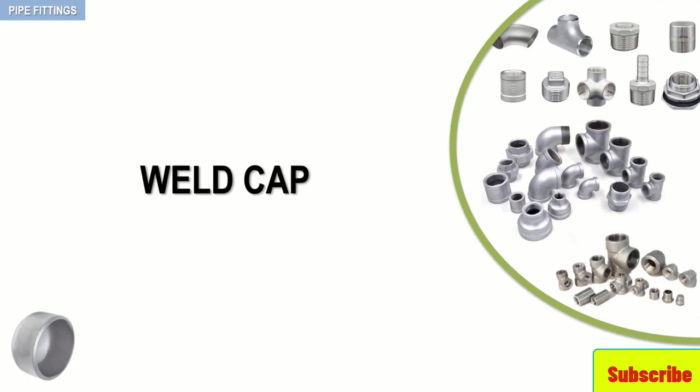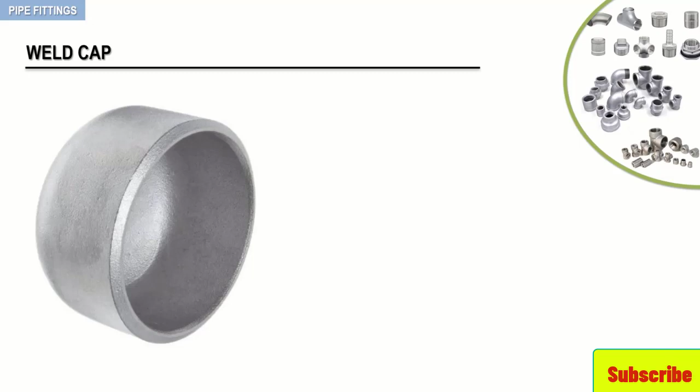The last weld fitting we will discuss is the weld cap. Let's have a closer look. The weld cap, as in this example, is used to seal or cap the open end of a run of pipe. You can see here a typical example of a pipe equipped with a weld cap.

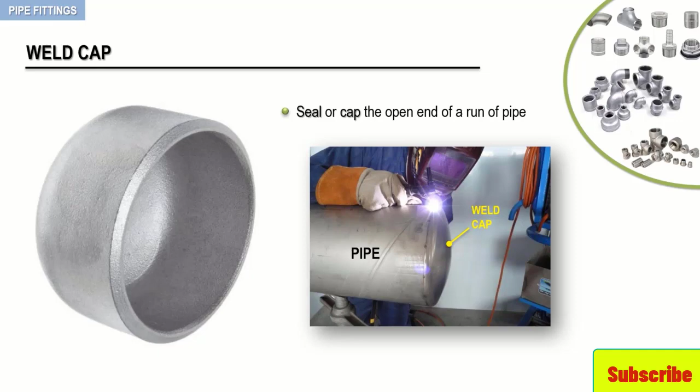On isometrics or mechanical drawings, the weld cap, just like most other fittings, can be drawn as a single line or double line symbol, depending on the pipe nominal size. When representing the cap on a drawing, an ellipse is used to construct the round end of the fitting. Finally, notice the weld dot on the single line symbol is drawn as a half circle only.

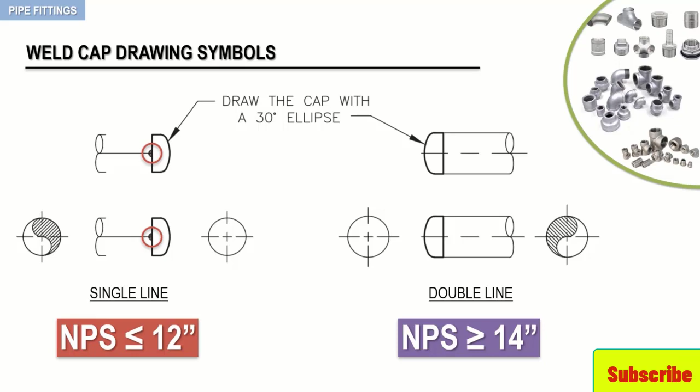So far, we have discussed each fitting individually. We will now look at how they relate to other fittings when used in the design of various piping systems. Actually, depending on the given situation, fittings will be either welded to each other or separated by lengths of pipe. Welding one fitting directly to another is called fitting makeup. Single line and double line representations of fitting makeup are shown in the following example.

On the double line drawing, you can see 4 fittings welded to each other: a long radius elbow, 2 consecutive tees, and another long radius elbow. The single line drawing represents the same set of fittings, and you can see here the weld dots highlighting the welds between the various fittings.

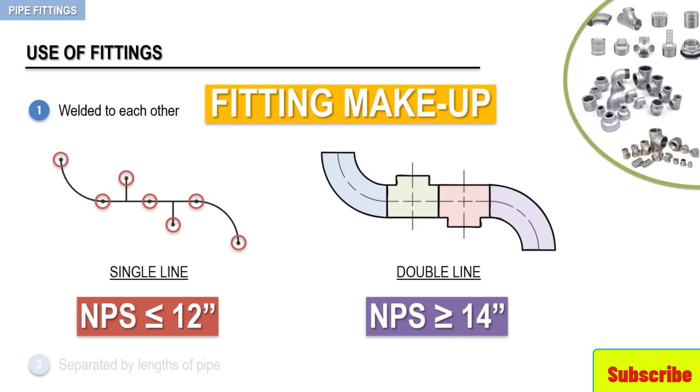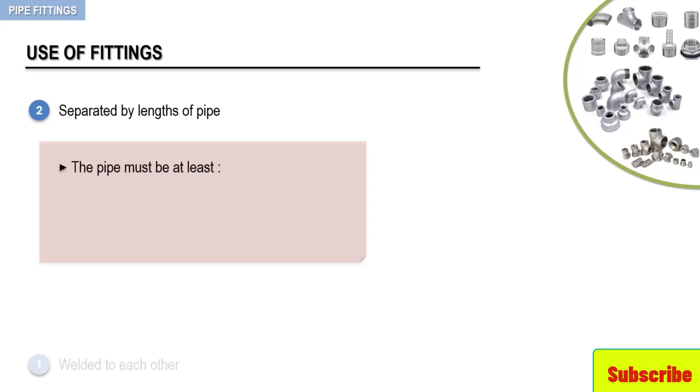Now, in most situations, the erection of the piping system will require the designer to use pipes of various lengths between the fittings. In these cases, the pipe is cut to the appropriate length and then beveled in preparation for welding to a fitting. When a pipe configuration is not assembled as a fitting makeup and the fittings are separated by a short section of the pipe, most companies stipulate that the pipe must be at least 1 pipe diameter long or 3-inch minimum length, whichever is longest.

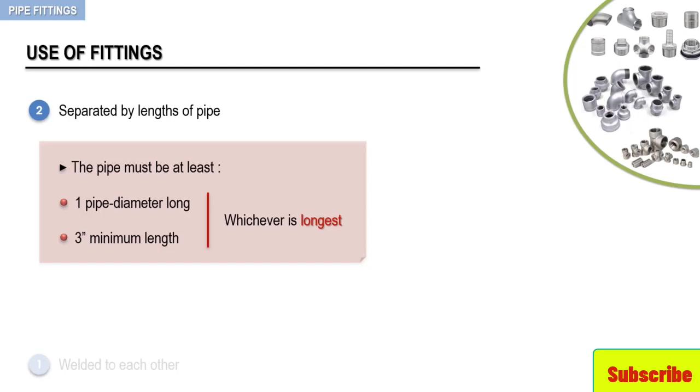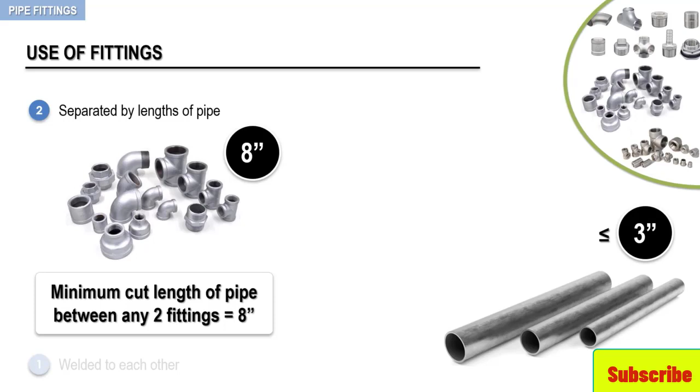A cut length of 1 pipe diameter means that any section of pipe that is to be placed between 2 fittings must be at least as long as the nominal pipe size of the fitting being used. For example, if 8-inch fittings are being used, the minimum cut length of pipe between any 2 fittings is 8-inch. For pipe configurations of a 3-inch nominal size or smaller, the minimum pipe cut length is 3-inch. These short sections of pipe are sometimes referred to as spool pieces.

Here, keep in mind, it is important to maintain this minimum spacing because once assembled, each weld in every piping configuration must be X-rayed and heat-treated. X-rays are performed to guarantee the quality of the weld. Once a weld has been completed, if another weld procedure is performed too close to it, the heat from the new weld may have an adverse effect on the first weld.

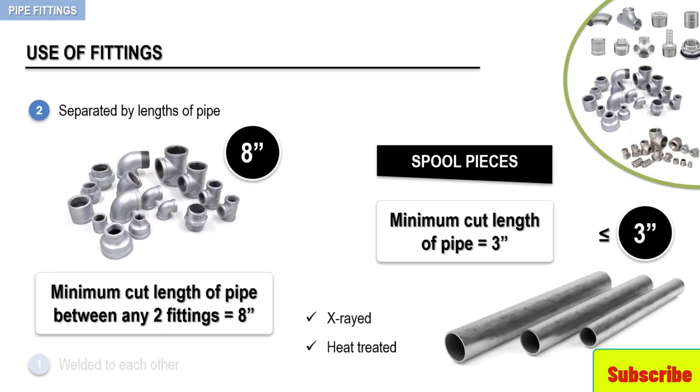Therefore, the 1 pipe diameter minimum spacing allows the pipe to dissipate the heat before it can spoil the first weld. By maintaining a minimum spacing between welds, a pipe can be conveniently cut, beveled, and welded without adverse effects on adjacent welds. The following figure depicts the 1 pipe diameter minimum spacing. Please keep in mind that the 1 pipe diameter minimum spacing is a standard used throughout the piping industry and will be applied to the piping drawings such as piping